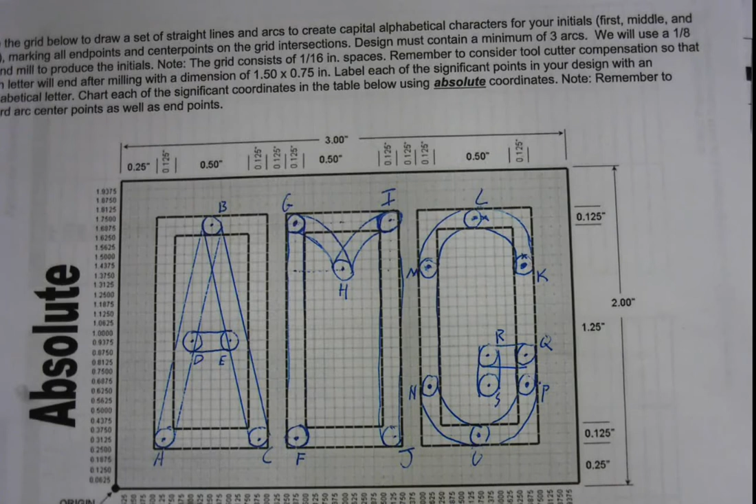Okay, so things you should be bringing to this video, since this is part 2 of the series for our G&M code: your planned out layout of your initials for your block. It should have all the letters labeled. This should already be done.

You should also already have done exactly what all of your points are. So these correspond to, like, point A is 0.3125, 0.3125. That corresponds to my point A here, 0.3125, 0.3125, okay?

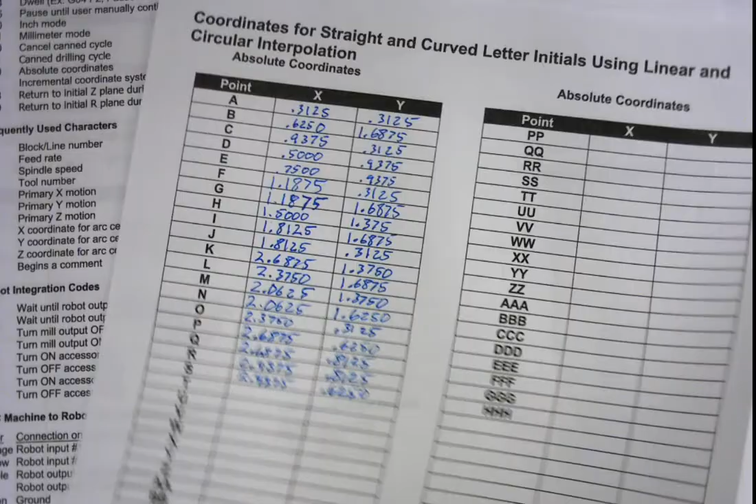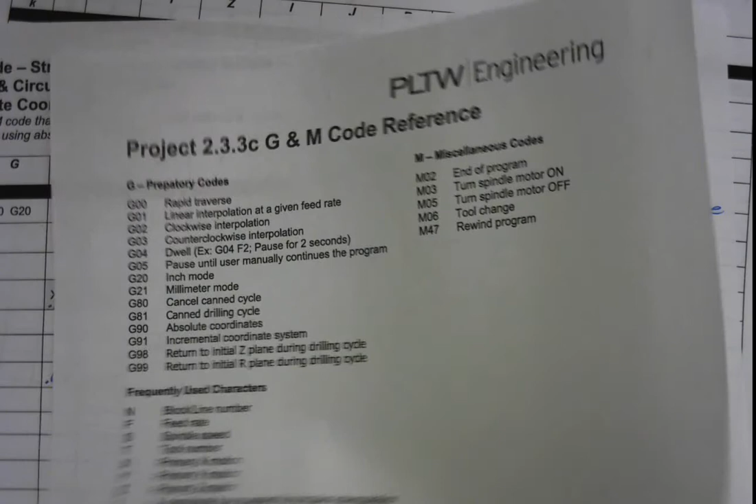And so the 4 sheets that you're actually going to need for this video, 2 of them required your work, the other 2 shouldn't really have any work on it. It should be our reference codes, which we're going to be looking at a little bit, and then this planning tool. I've made a couple of changes, so it's not too crazy.

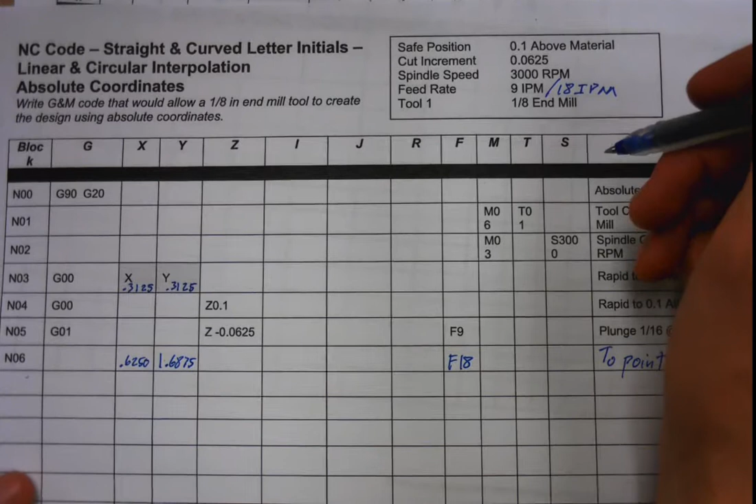The spec sheet says 9 inches per minute, that's what IPM means, but we also want to have 18 inches per minute. So we're going to say 9 inches per minute for when we actually plunge into the part, and then 18 inches per minute when we're moving through the part, because 9 inches per minute is a little bit slow.

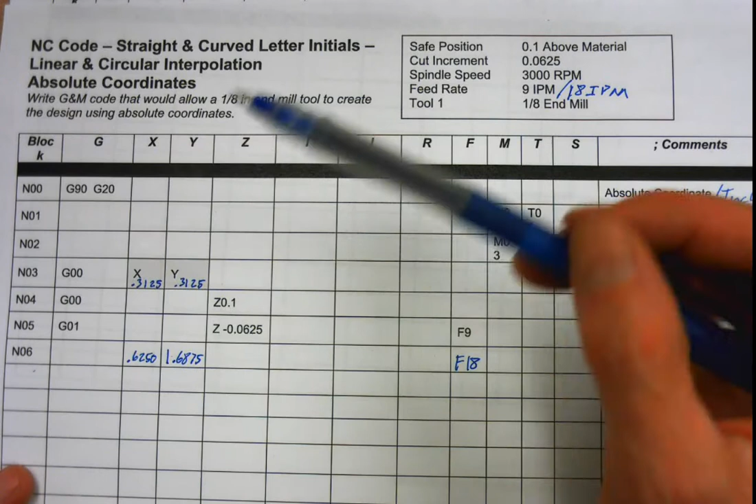Okay, so when we're going through this, we can read this. These lines right here, the block, is just what line of code we're on. So this is line 0, this is line 1, line 2, line 3, line 4, line 5, line 6, and so on, okay? You could have programs in here that are 25,000 lines long.

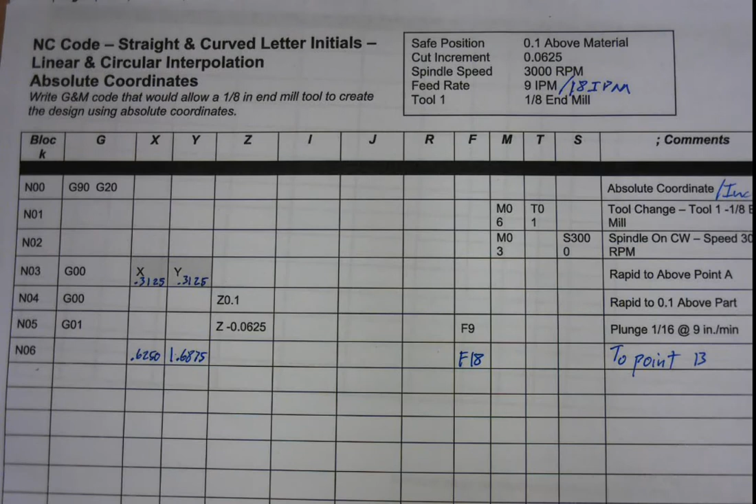You don't have to do that right now. You're not going to be doing that by hand. That'll be generated by the computer, but we want you to be able to read what's happening in those codes. Let's say if there's an error, the best way to do that is actually just to write some simple code.

So line 1 says G90, G20 is our G codes. I'm going to look back at my reference sheet, and I'm looking for G90. I'm going to look at my G codes, these are what we call preparatory codes. I see G20 is in inch mode, so we're going to be talking in inches, which makes sense because our layouts are in inches. And then I'm looking for G90, absolute coordinates, and we are working in absolute coordinates. So we are working in inch mode, absolute coordinates, all right?

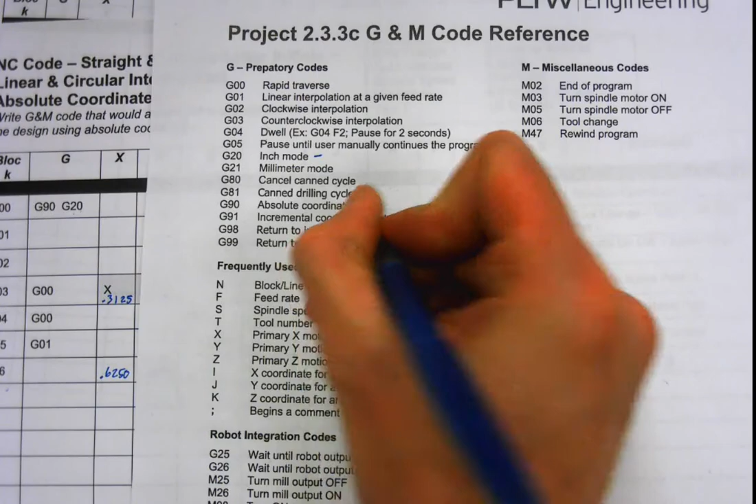And then, so that's line 1. So line 2 says a tool change, and we're putting the tool, tool 1, which is our 1/8 inch end mill. Okay, so that's matching up with what we're reading up here, 1/8 inch end mill.

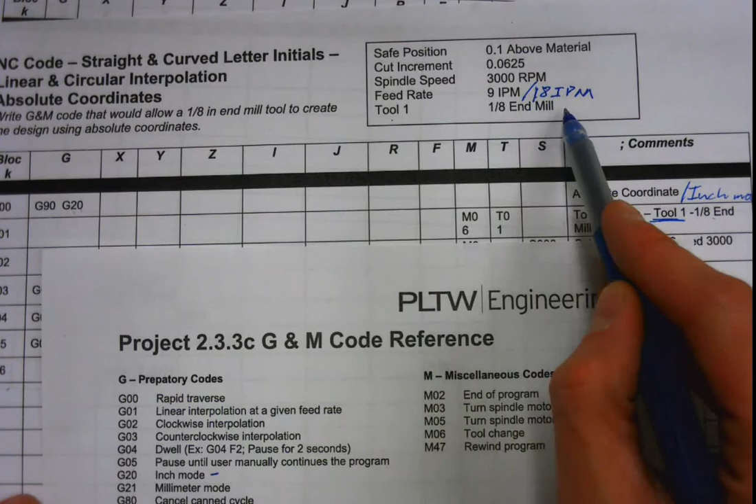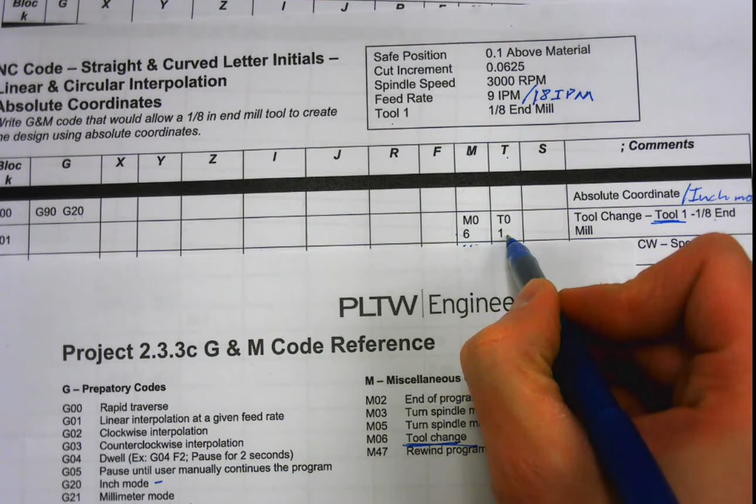Our miscellaneous codes, nope, are frequently used. Let's see, where are my M codes? Tool change right here. So our M06 code, and we say M06 right here. It matches up with my M codes, and it's going to be tool 1. So this is tool 1, and M06 is the tool change, and we're getting that from right here.

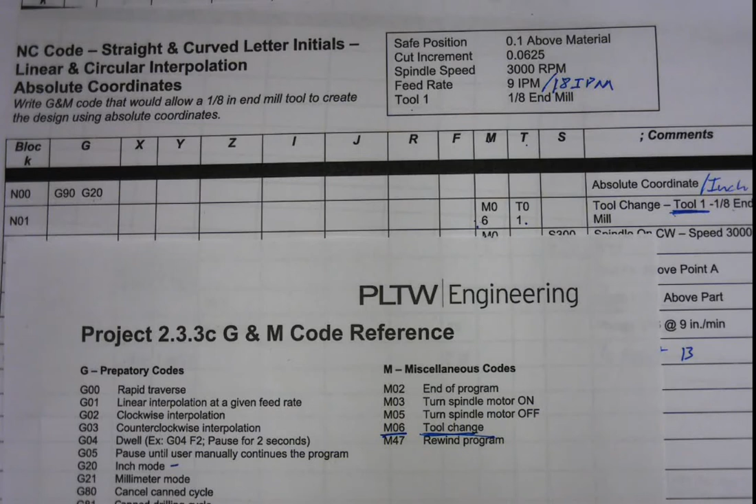Okay, so the first 2 lines are almost always going to be the same for your codes. This might be G91, or if you're doing counterclockwise or clockwise through a curve, which you will in a little bit, it would be G02 or G03, depending on which direction your curve was. So you've just got to get used to writing with these codes. It comes down to familiarizing yourself with the code and imagining what the machine is doing.

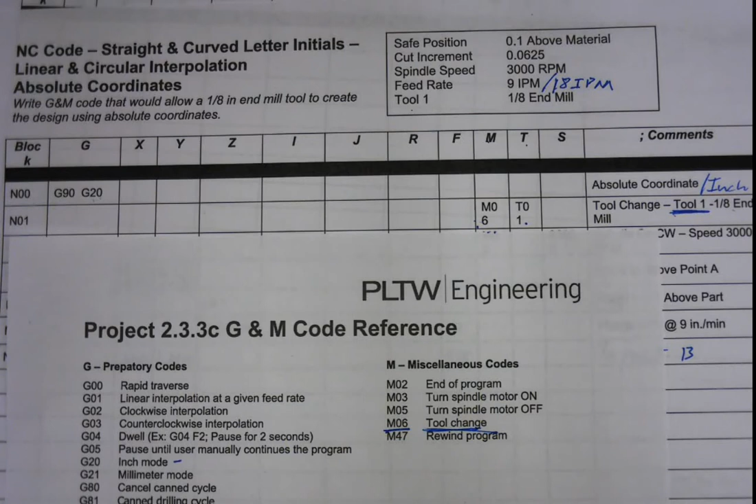Okay, so then we have our spindle speed. Remember, you've already calculated how to calculate your spindle speeds, and we're going to be spinning at 3,000 RPM. So we say M03, that's our turn spindle on, and then we're going to say turn spindle on at 3,000 RPM. Okay, so far we've turned the machine on, we've told it how we're going to read the code, we've told it what tool we're going to use, we've told it how fast that tool should be spinning.

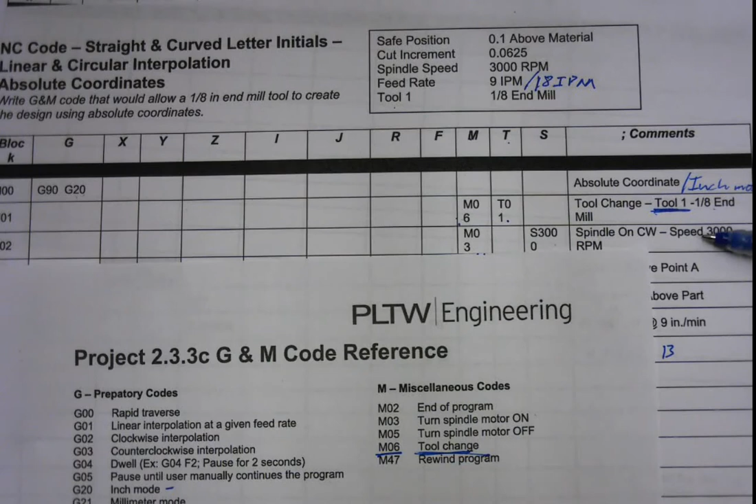We haven't really moved it at all. We've just turned the machine on and made sure that the spindle is actually spinning, so made sure that our mill is actually turning around.

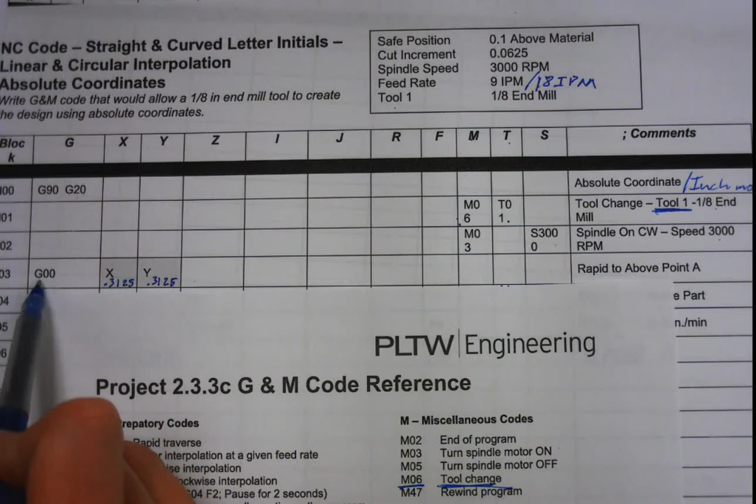Okay, next up, we're going to have our first movement, and we're going to say G00. We are above the part right now. So right now you have a block of wood that's sitting in our CNC. This is our stock.

Okay, and we have a spindle, a little drill. Imagine it being a drill. We call it a spindle, and our end mill on it. So far we're turning it on at 3,000 RPM.

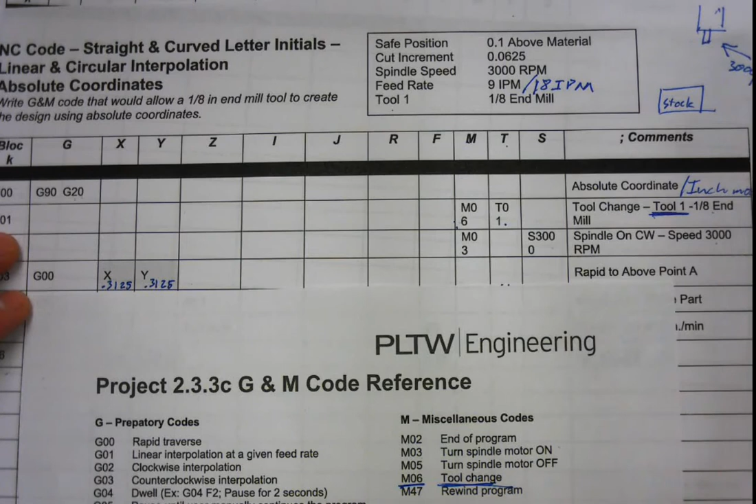We have not moved this at all, and we are above the part. We're not milling anything right now, so when we're above the part, we can move at G00. If we look at what our G00 is, that is rapid traverse. That means the machine is going to go as fast as it can possibly go to whatever position you're at. So you definitely do not want to be milling when you hit this code. You don't want to be in the part when you use this code, because you might break your spindle, you might break your part, things might shatter, and that would not be good.

You don't want to move that quickly through the part. But when we're above the part, we want to move quickly, because in the end, time is money, and we do want to make sure that you are using the machine time efficiently.

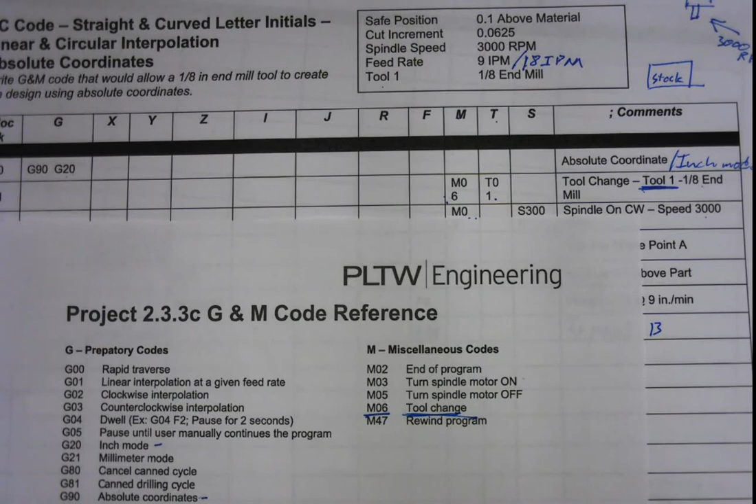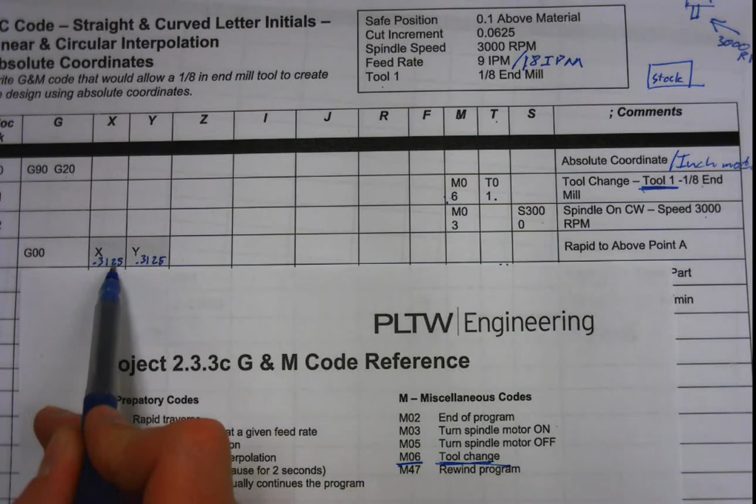So we're going to say G00, and you can see I've put rapid to above point A, and your point A might be a little different than my point A depending on what your initial was. My point A just happened to be 0.3125, 0.3125. That's this A right here. Yours might be different. Maybe you started yours up here, and your point would be 0.3125, 1.6875. It really depends on what your initial is, whatever this point would be. Mine is 0.3125, so that's what I put.

So I'm still above the part. I am not milling yet. Nothing, the wood has not been cut yet. And then I'm going to move rapid again, to the Z axis, and that is 1/10 of an inch above the part. So I'm still not on the part. So far I've moved down really quickly. I'm about here above the part. I'm not actually milling yet.

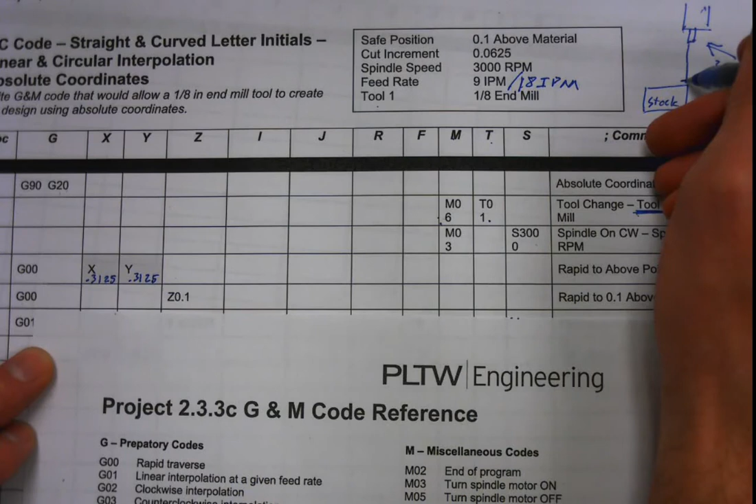So far, we've really only had to enter one thing here that might be different on your parts. It's this right here, moving rapid above point A. You're not actually milling yet, okay? And then we're moving rapid to 1/10 of an inch. And then our next one, you can see how the Z-axis has actually gone negative now.

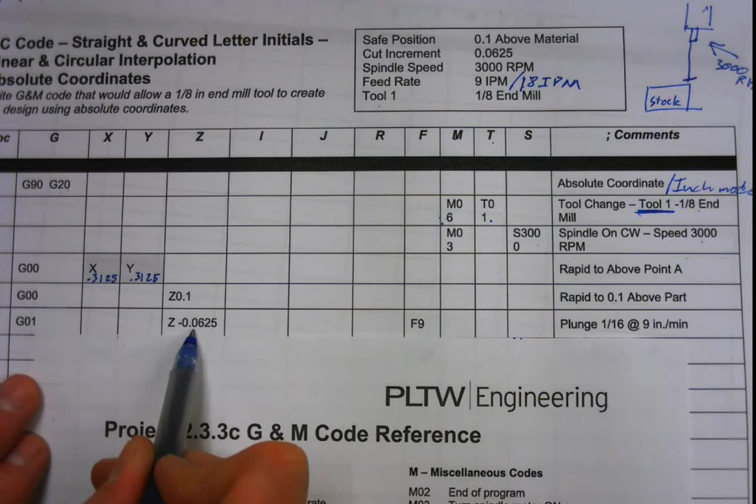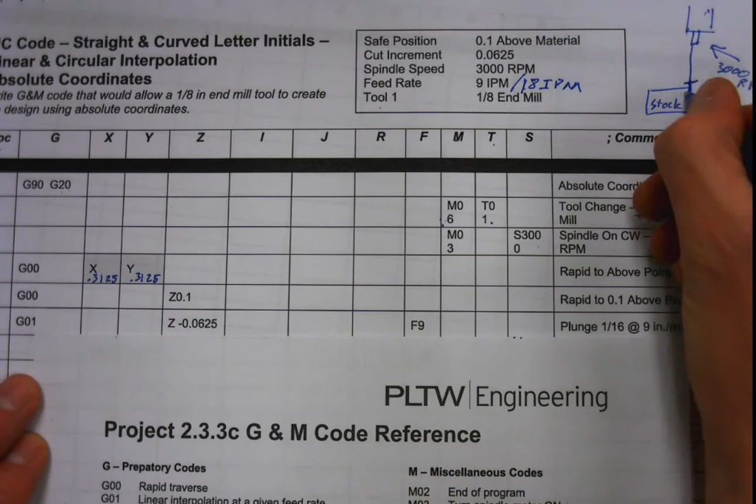If we're negative in absolute programming, that means we're milling in the part. And when we actually start plunging into the part, if we look at our little diagram up here, now when we're plunging into the part, we're actually milling something. You've drilled a hole. Okay, this is actually drilled a hole.

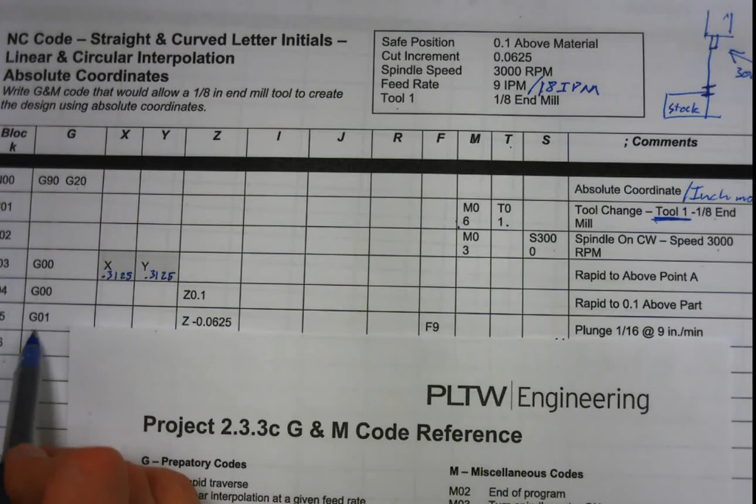And when you're plunging or retracting, we want to go slowly. So we're going to set that feed rate to F9. So we've changed our code to G01. If we look down here, linear movement, this is just straight movement, and we are going slowly on straight movement. Once you hit G01 though, you don't have to hit G01 again until you change the type of movement that you're doing.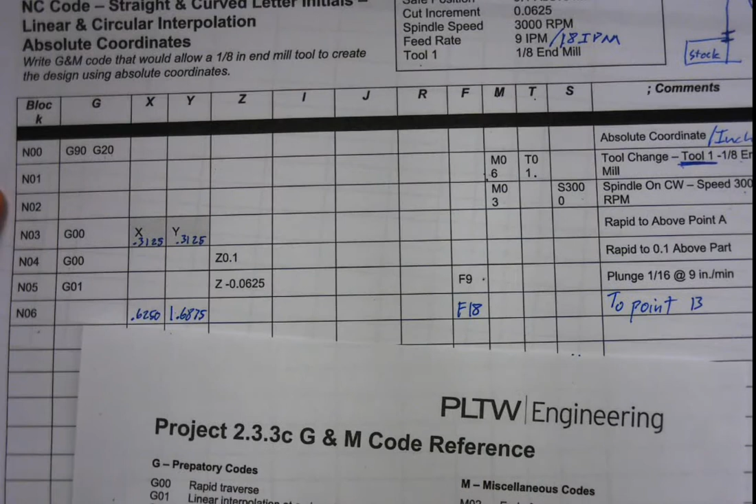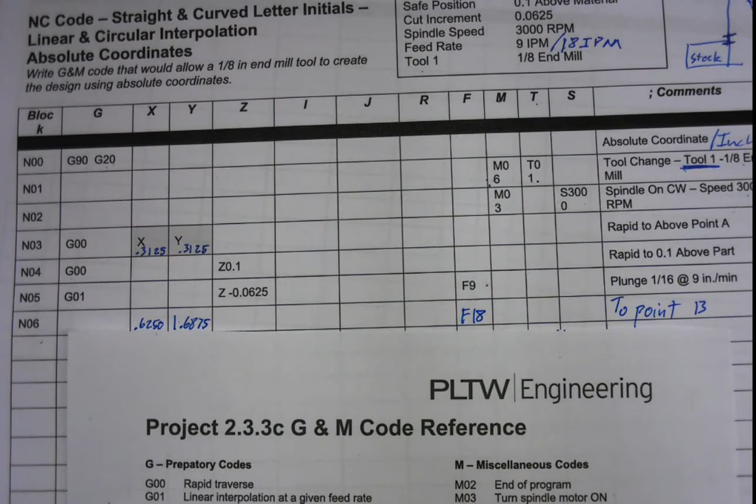I'm not going to do all of my letters on this because that would be really boring, but I am going to do a couple of movements, and then I'll put a second video in there for moving through curves. But it's really nothing crazy about how to move through the parts now.

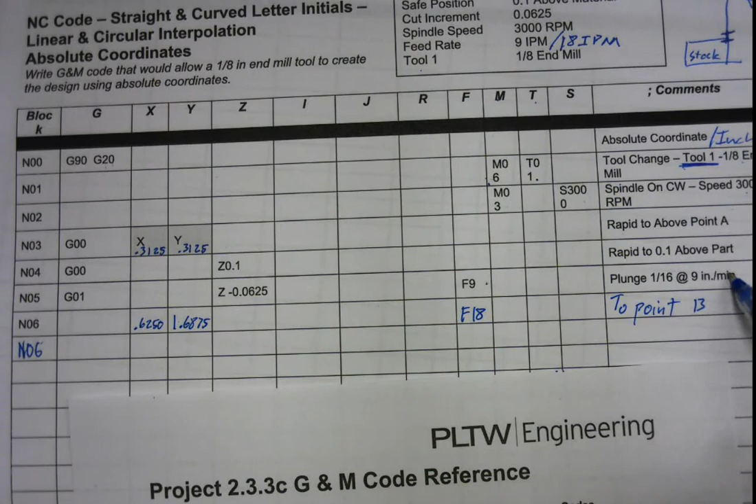Now it's just a matter of what line are you on, N06, and what do you want to move to? So I moved to point B now. I was at point A, I plunged into the part, I moved to point B, and at this point, I have milled this part right here.

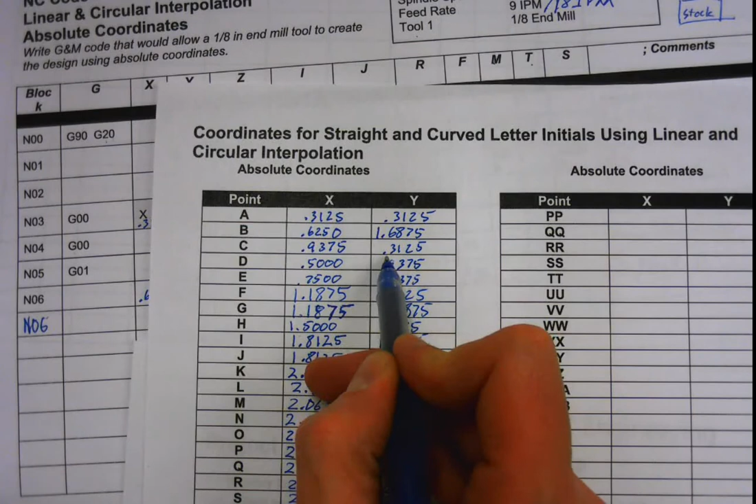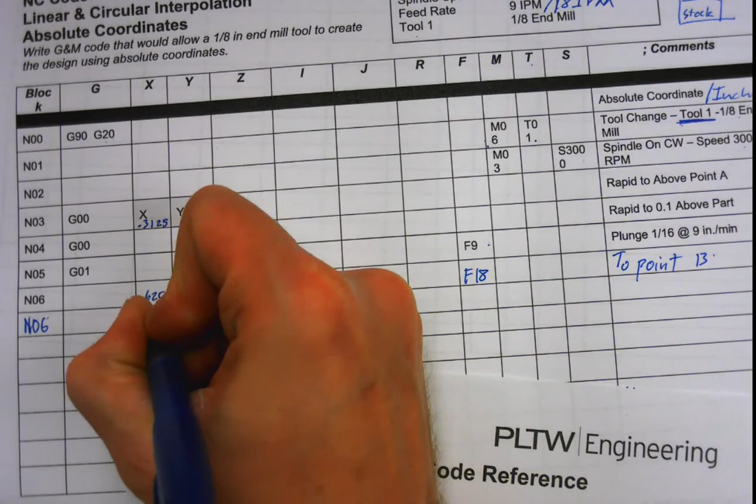It's milled from point A to point B. I'm up here now. Now I've got to go in a straight line to down here. So I'm going to go from point B to point C. I look at my point C reference guide. Point C was 0.9375, 0.3125.

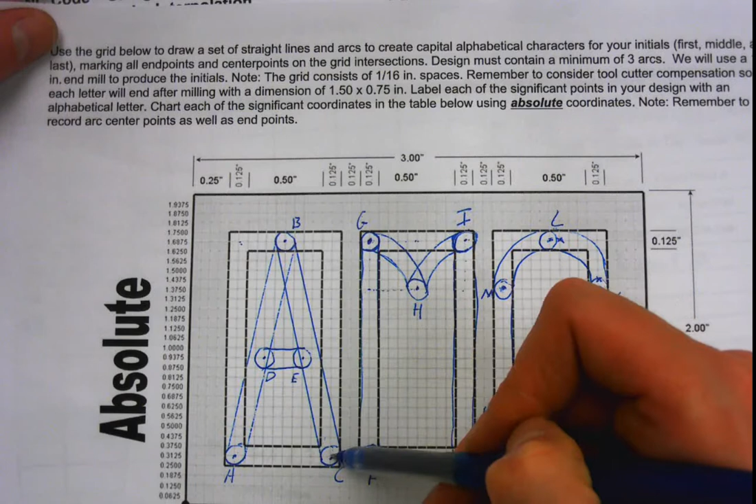And so now I've gone from A to B, B to C, and you don't want to move up through the part to point E because you'll start milling an edge of it. And even if this was straight in the middle of this, you wouldn't want to move there anyway, because you don't want to move through a part that you've already milled unless you're milling new things. So what you need to do is actually pull the bit up above the part. We're going to pull it out of the part, and that's going to be line 7.

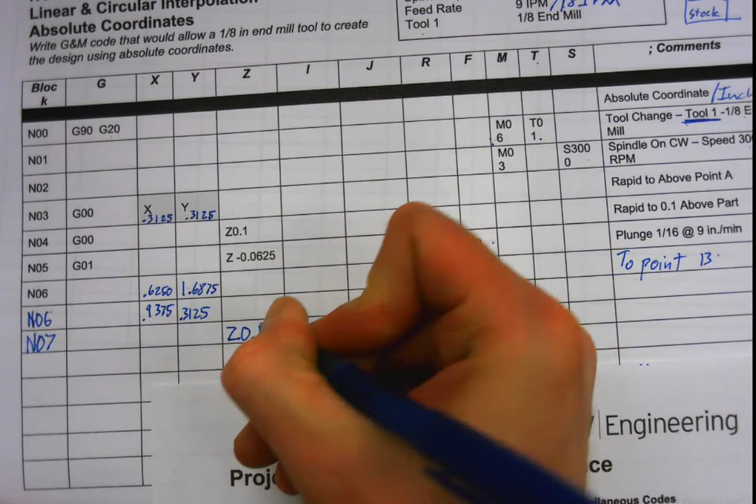And we're going to move on our Z-axis to Z.1. This is going to be my notes for this. Actually, let me write out to point C. And then my notes for this one are to above the part.

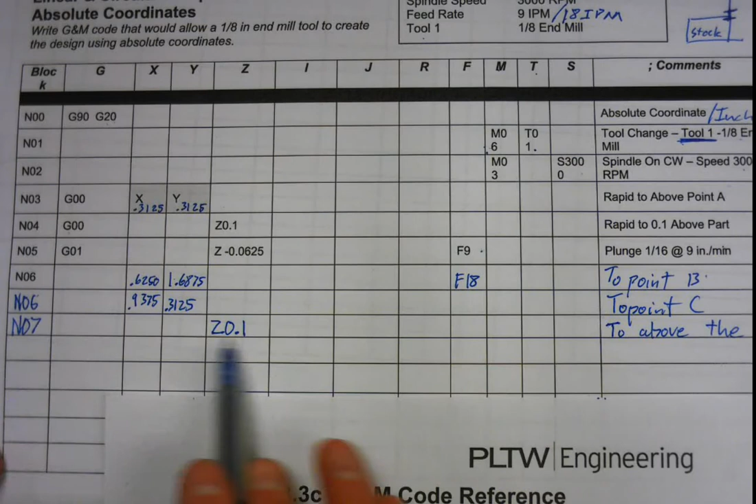Okay, so now I'm not milling anymore. We're above the part, and so now we're actually ready to move to our next point. So line 8. I was at point C, I need to go to point D. So I'm just going to put in point D here.

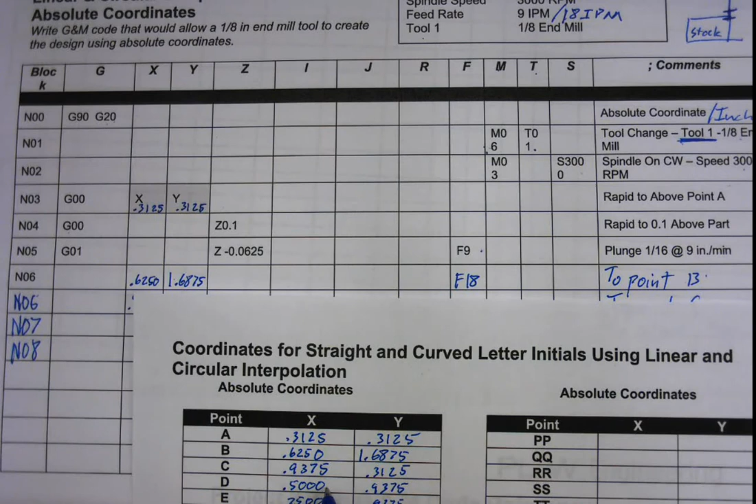I'm going to look at my reference chart at point 5000 and then point 9375. And then I'm ready to go put my notes in here to point D.

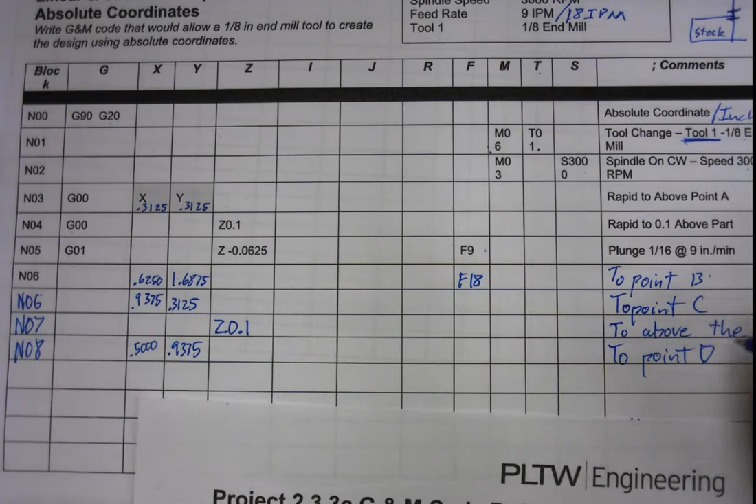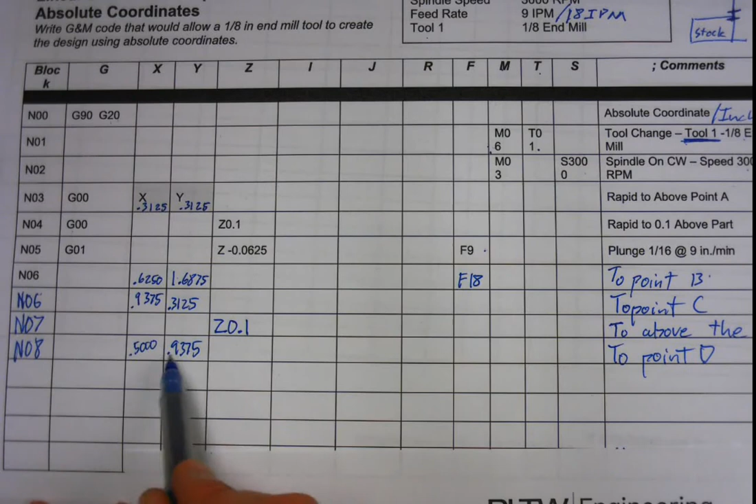And then you don't want to move in two directions at the same time. I would not want to put my z-axis here because you would get a curve and it would mill eventually towards the end of it, and it wouldn't give you the right thing. You don't want to move on all three axes at the same time, just in this intro.

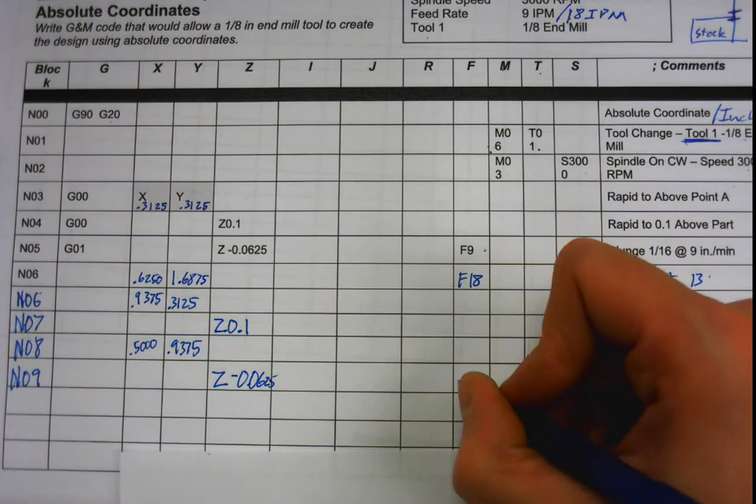So I'm going to write another line, N09. And this one is just going to be Z negative 0.0625. Okay, and my feed rate is going to be 9. Okay, so sorry, one last thing. I can move in a rapid movement here, G00, because I'm above the part.

So G00 above the part, and then I'm going to go back to G01 here, and I'm going to go slowly, feed rate to plunge back into part. Okay, so we're going to say plunge 1/16.

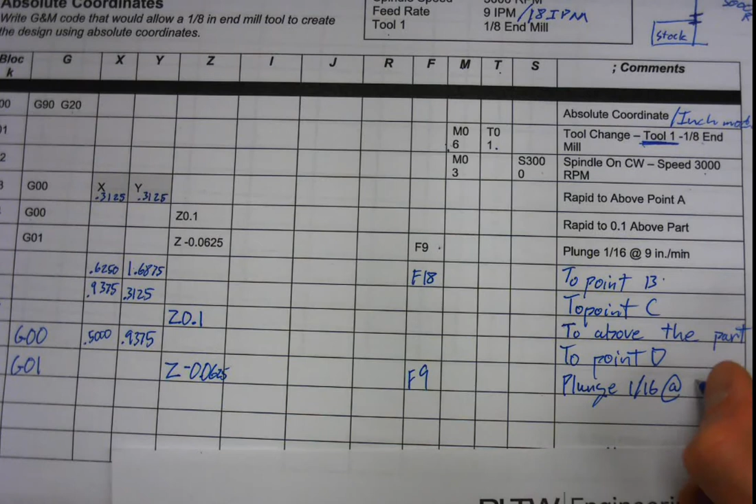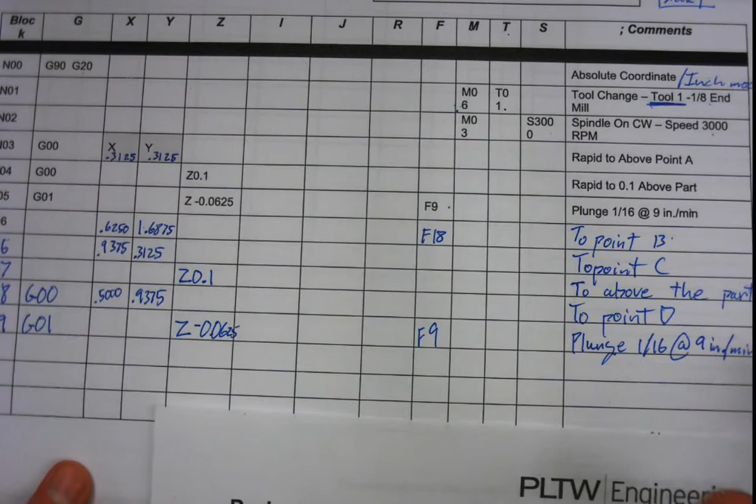And yes, you do need to write out the notes. You cannot skip the comments, because when you have errors, and you will have errors, the comments are going to help you out with what the part is actually supposed to be doing, or what the machine is actually supposed to be doing.

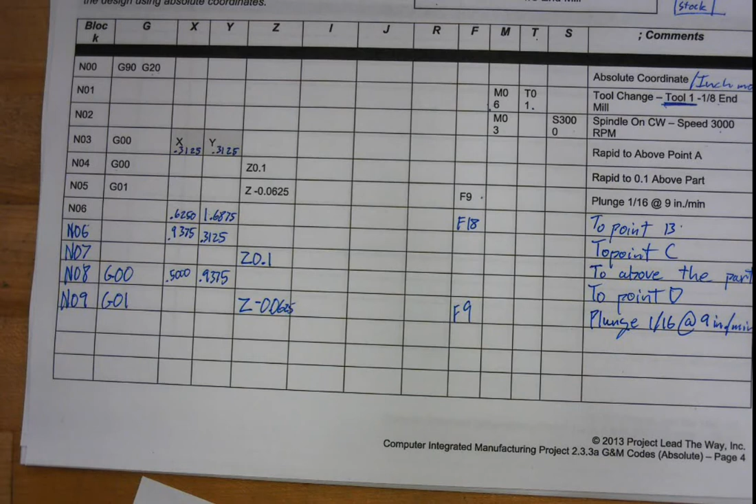Okay. Up next, man, I'm at 12 minutes. I gotta get to the curve, and then I'm gonna end the video. I do want to show you guys how to do the curve part of it, and then I'm gonna end the video because it is getting a little bit lengthy here.

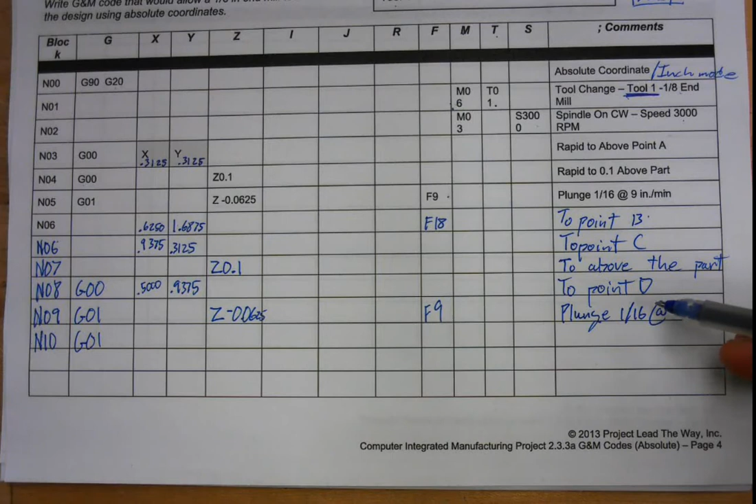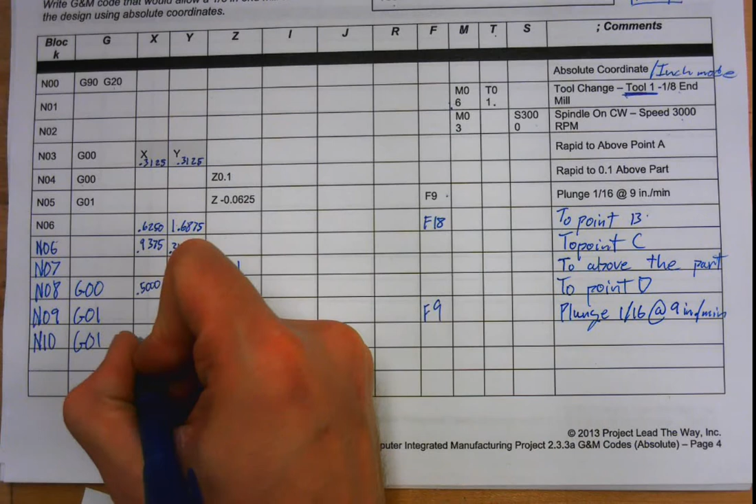N10, okay, so my line 10 code. I'm looking at G01, and I'm at point D right now. So I've got to go to point E. And point E, looking at my reference guide, is 0.7500 and then 0.9375.

Okay, so I've now moved to point E. And then I'm going to go to my next line, which I actually need to pull back out of the part. So if I look at this, I've milled here, I've plunged in at A, gone to B, gone to C, pulled the mill back out, gone over to D, plunged back in, gone to E, and now I've got to pull the mill out before it goes to F.

So I'm going to say Z 0.1, and we're going to say feed rate 9, and this is above the part.

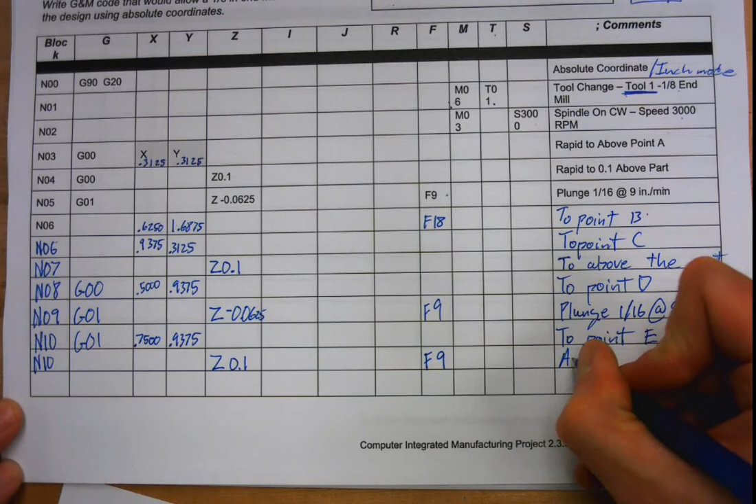Okay, and then we're going to say line 11. We want to move rapidly to point F, and I'm going to do 2 more points. I'm going to go from F to G, and then show you how to do the curve on H.

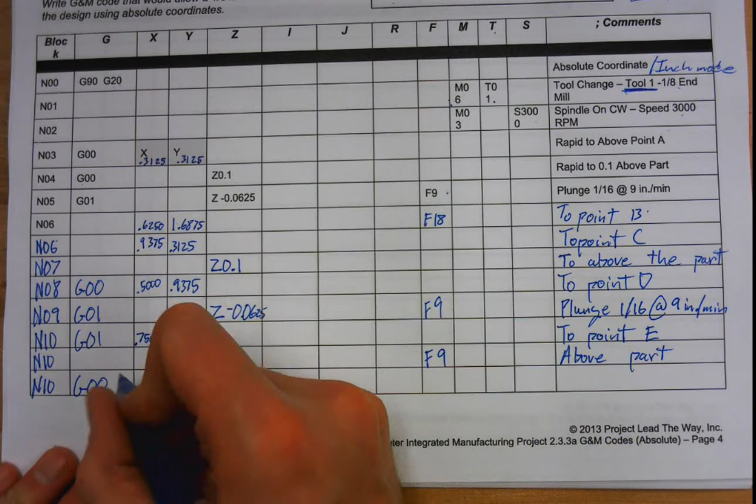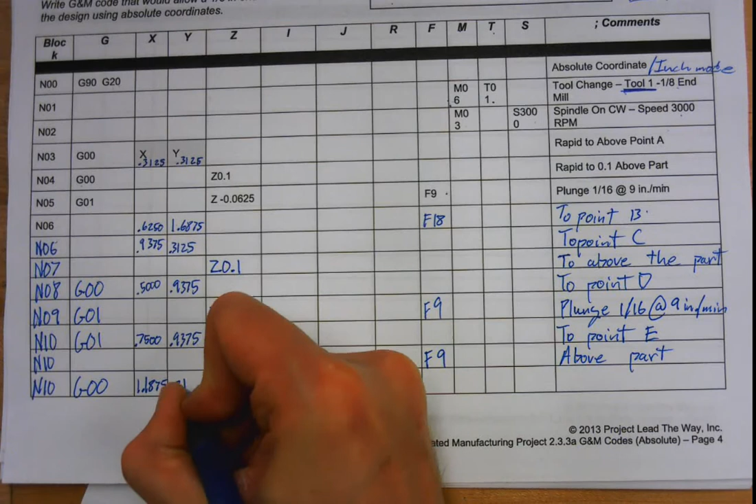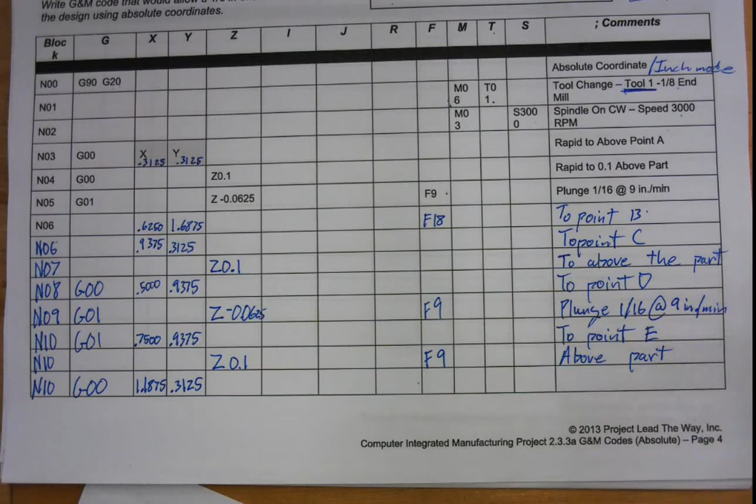Okay, so I don't want to spend too much time on this because it's really kind of repetitive after this point. So I have G00, and I'm going to go above the part at point F, and looking at my reference guide right now, point F is 1.1875. Your point F is probably going to be different because you probably don't have the same initials that I have. And so it's going to move there, and we don't have to put the feed rate in this case because it is moving quickly, and we're going to say to point F.

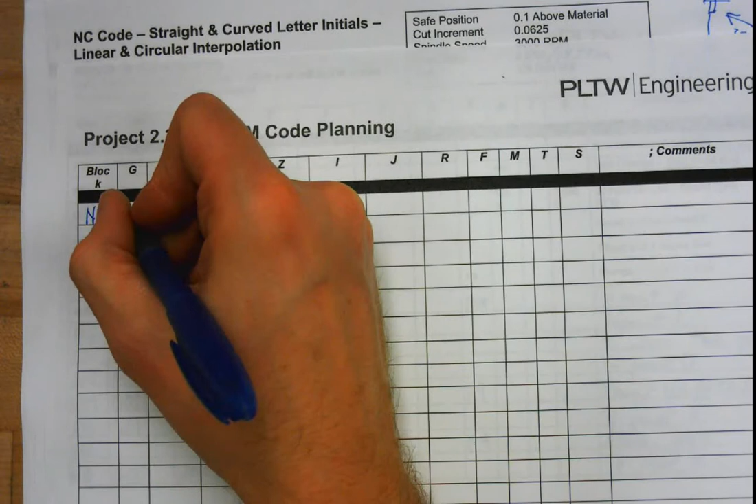All right, and then I'm on my next page. So I'm currently at point F above the part, which means I need to move into the part. So sorry, what was my last line? So I've got N10, and my G code is going to be G01. Make sure I'm moving at the right speed. And my X value is not changing, my Y value is not changing, but my Z is.

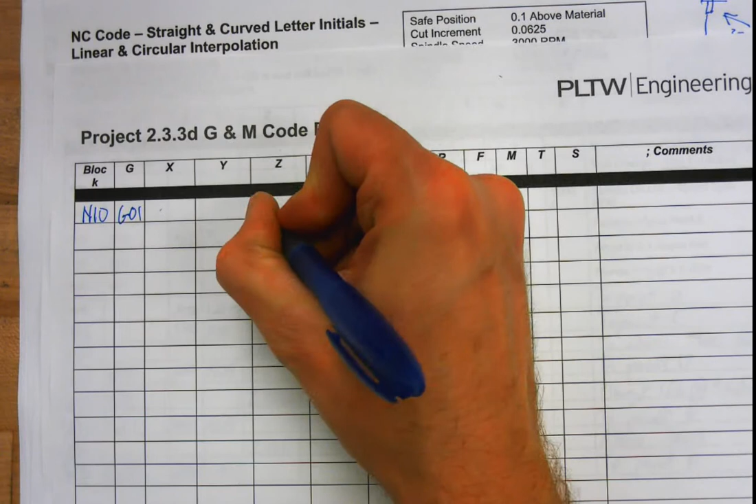I'm going to plunge into the part, and that plunge, let's look at what we had before, just want to make sure we're all consistent, was negative 0.0625. Again, a negative on the Z means you're in absolute programming, means that you're going into the part, okay?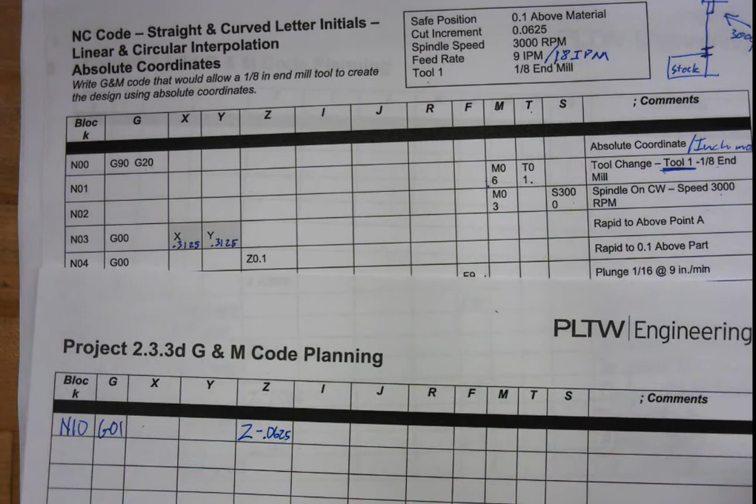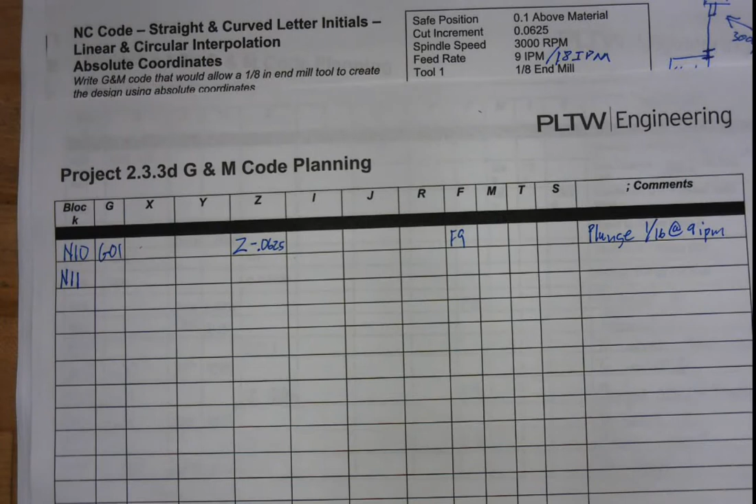So we are plunging at 1/16 of an inch at 9 IPM, okay? And that's our feed rate, it's going to be F9. Okay, so now that we're in the part, we're going to go 2 more lines. We're not going to go past that because I just want to get to a curve and show you the curve, and then I'll post another video on actually how to type this into your code, into the software.

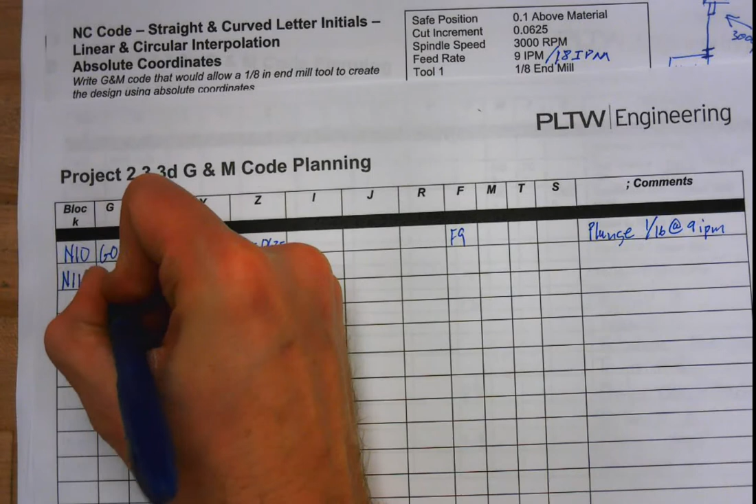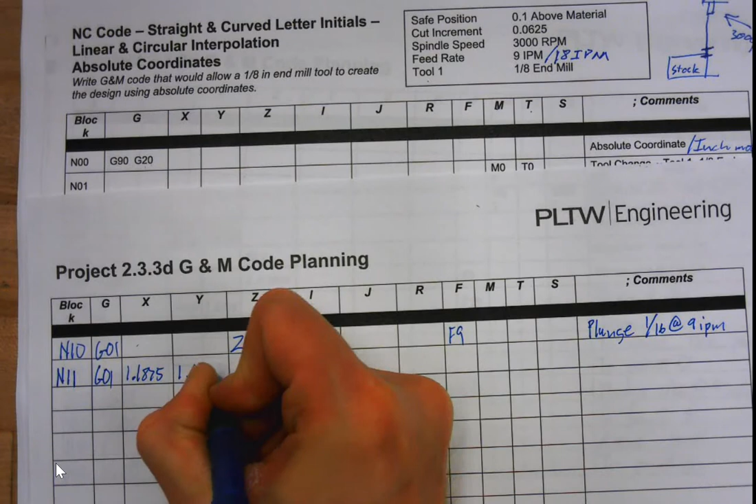So I have N11, and we're looking at G01. Okay, so straight line. And let's look at what we were at last time. We were at point F, and so now we're going to go to point G. Again, I'm going to look at my reference guide, and X is going to be 1.1875, and then it's going to be 1.6875.

If you're wondering where I'm getting these 2 numbers, I'm getting them from here. I made this from this. Okay, so I had to design it first, and then I had to identify all the points on it.

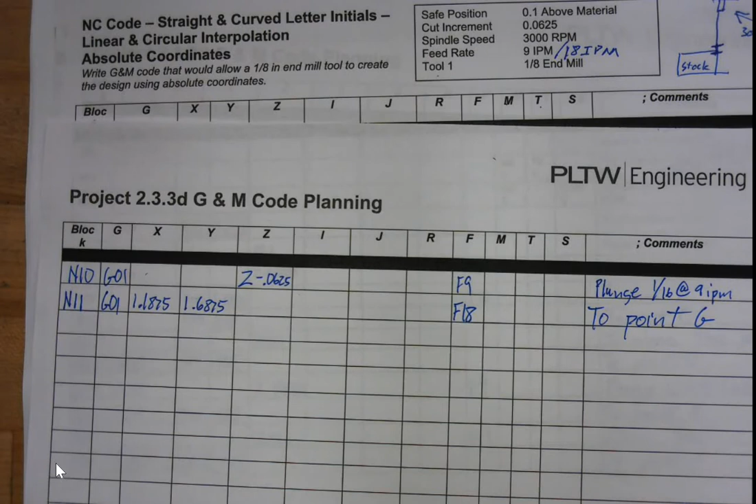So again, we're at point, let's see, we were at point F, and now we're at point G, and we are milling at a feed rate of 18 inches per minute. And this is pretty slow, but we want to be conservative. We don't want to break anything, especially since this is our first time doing stuff.

And now we are actually ready for the curve. Okay, so at this point, we've milled all of A, we've gone from F to G, and now we're ready to go from G to H around a curve. And so when you're going around a curve, you've got to think about what direction you're using, and then which code you're going to use.

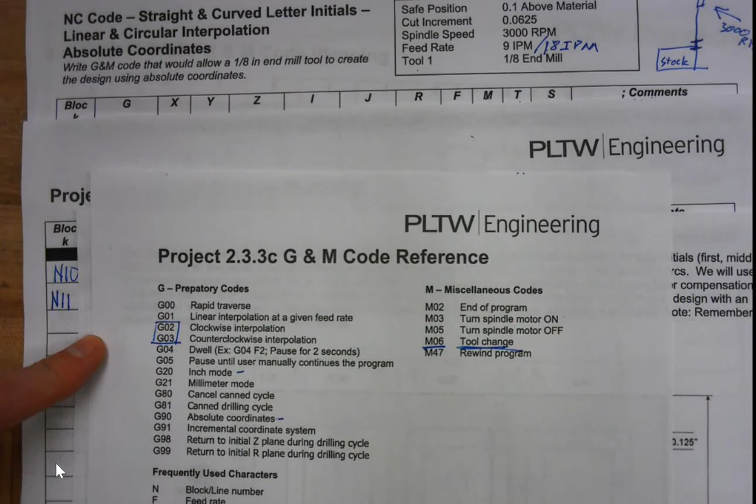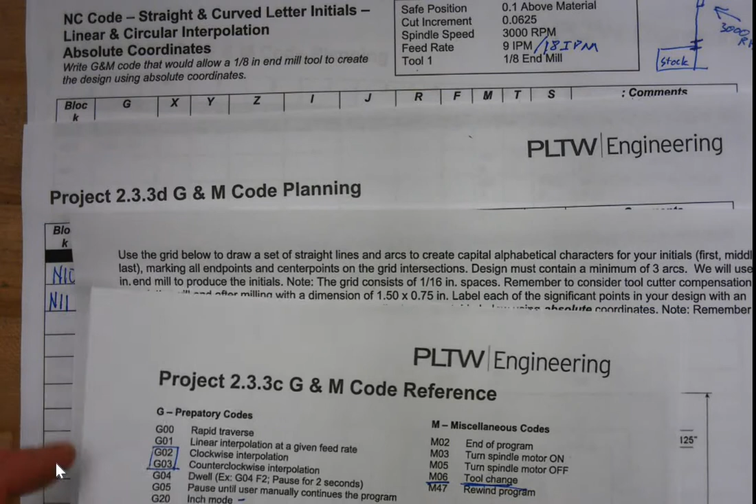So for curves, we're going to use this one, G02 and G03, depending on which way we're rotating. And so it comes down to our planning tool here. We went from F to G, and now we're going to go from G to H. Okay, so that means we're rotating in a clockwise direction. So we're going to use G02.

Okay, so we have line 12, and we're at G02. Okay, so that tells us that we are going through a curve, and the curve we want to end at is point H. So we're still going to put a point H here, which is 1.50. And then we have 1.375. Okay, but when we have a curve, we need to tell the machine to go in a certain radius.

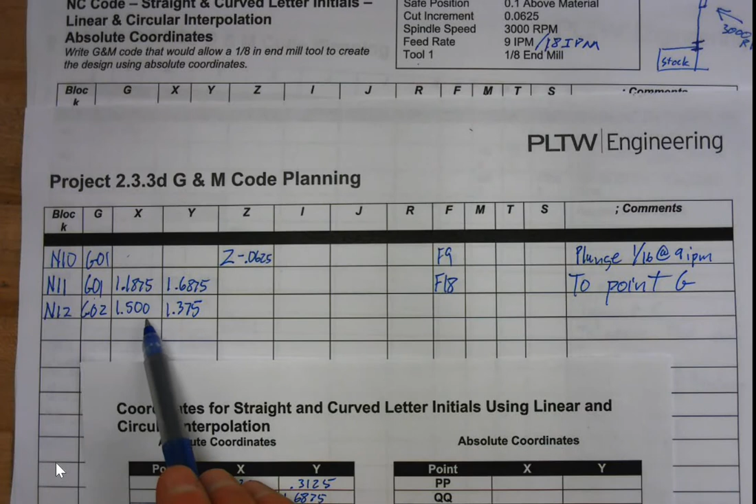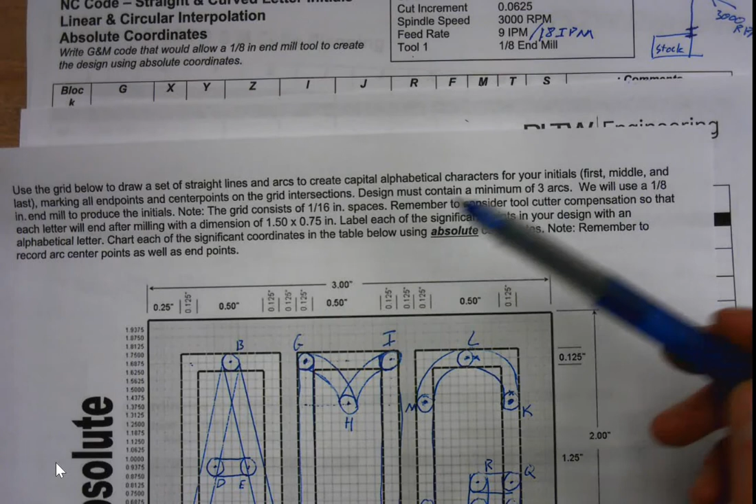So we're going to go to radius here, and we're going to figure out what our radius is. So we have 5 squares here, right? Remember I was telling you in the last video that you got to make sure you match up your radius. So we have 1, 2, 3, 4, 5. Now, you could figure out the exact spacing for all of them, and say each space is worth this much, and multiply that by 5. Or you could do the cheater way - it's already done for you down here. You just count out 5 spaces. So we go 1, 2, 3, 4, 5. And so our radius is 0.3125.

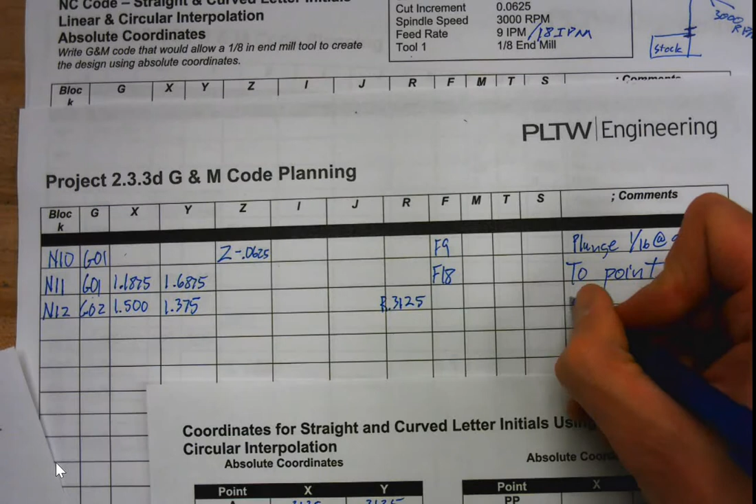And so we're going to put that in here under radius, 0.3125. So R3125. And so we're going to say to point H, and we're going to say clockwise curve, radius 0.3125. Okay, and so that gets you all the way to here, right?

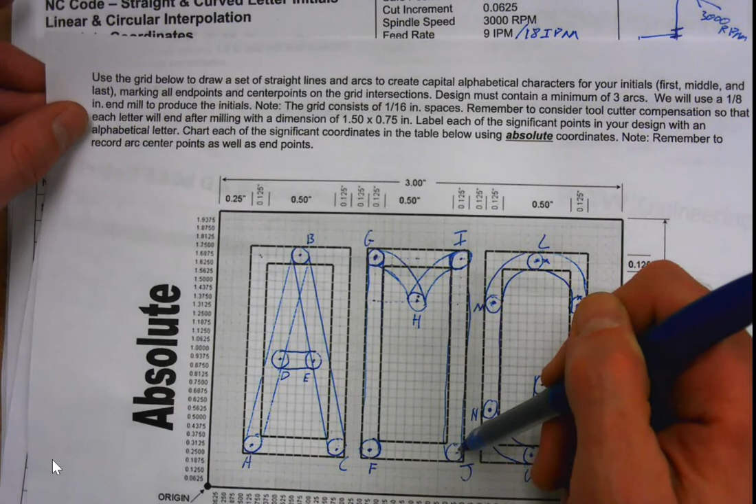So I've actually programmed half of this. I don't want to make you sit through the rest of the program. These curves are all the same that we did. Everything that I've programmed here is clockwise. If you wanted to, let's say if you wanted to go start from J and then go up to I and then move back this direction, you could, but this would be counterclockwise, because clockwise, remember, it's going the same way as a clock - that's this way. So clockwise, counterclockwise, it's just the other way.

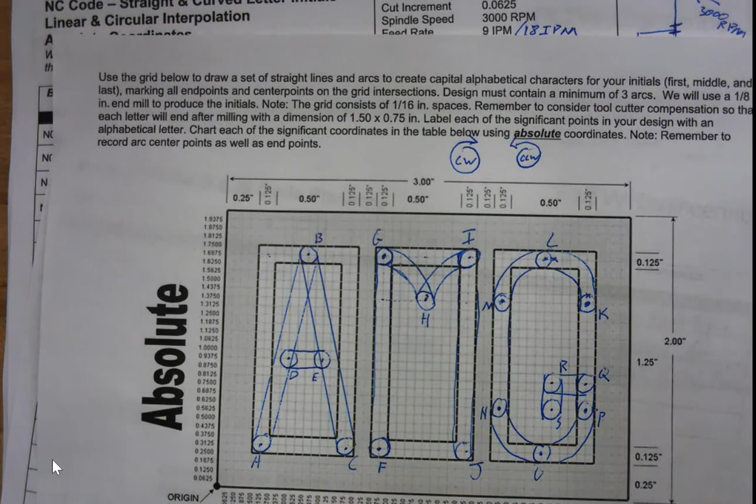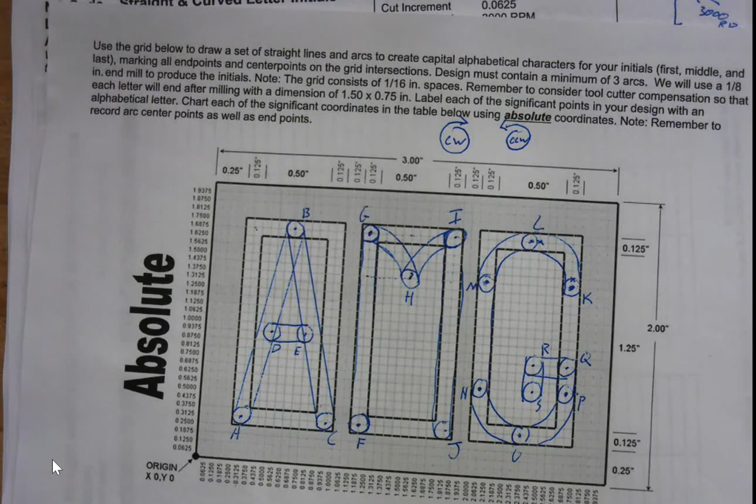Okay, so I'm going to end it here because it's already 20 minutes long. I don't want to take up any more of your time on this because eventually you have to do it. So now is your time to go do it. This is how I did the A and the M and the O. I'm going to finish writing my program, and then in the next video I'm going to show you how to get it into our software. I'm only going to do one of those videos because it will be the same for the absolute and relative programming either way, so no matter what type of programming you're using. So look for that next one coming up. Thank you.